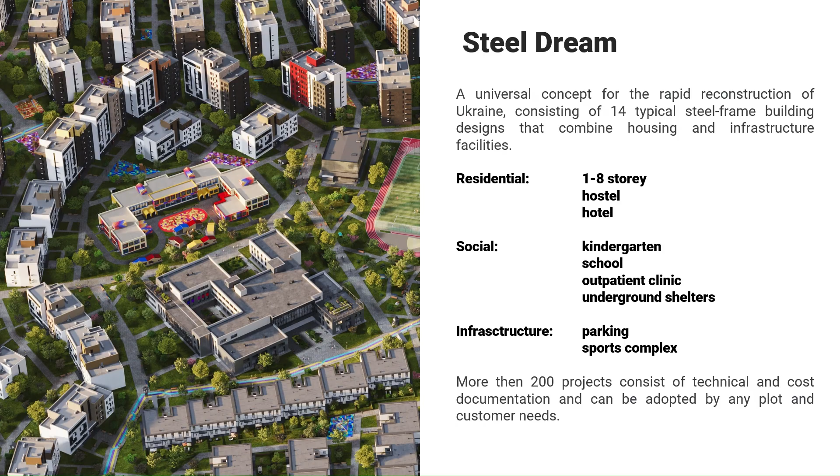Steel Dream is a universal concept for rapid reconstruction, consisting of ready-made building projects based on steel frameworks. Our catalog already contains over 200 residential and social infrastructure projects. The technology is based on a steel framework, which provides 4 key advantages: construction speed, reliability, flexibility, and environmental sustainability.

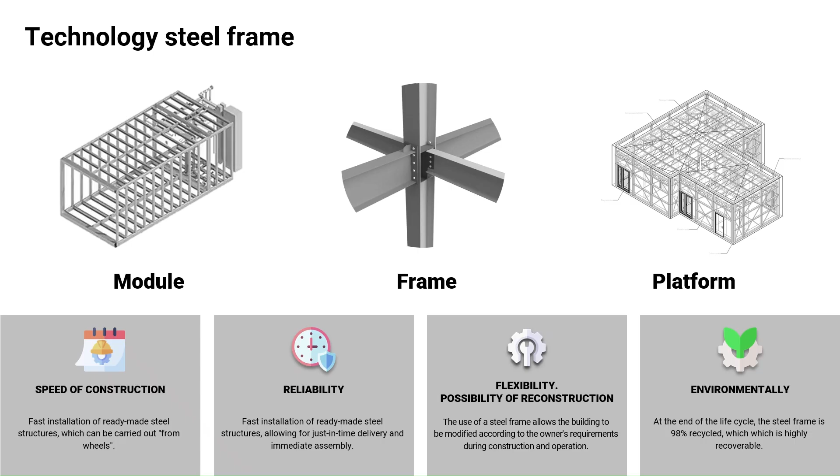Our approach is based on the principles of transparency, speed, and modularity. But most importantly, human centricity. Every solution is created with consideration for the people who will live and work here. We strive not simply to restore, but to create better conditions, following the Build Back Better principles.

Our cooperation is the result of combining efforts of many experts, government representatives, and civil society. The basic concept united the community's key projects into a single strategic vision and was presented to international partners. We present the final, detailed version.

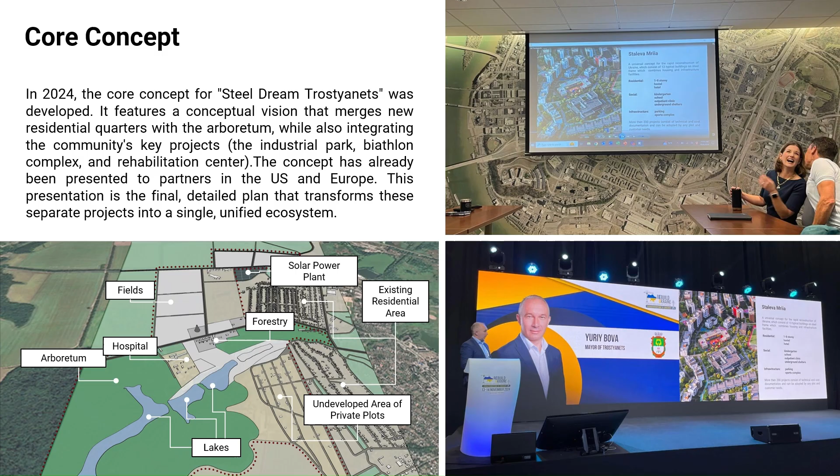Trostyanets is Ukraine's first deoccupied city, a symbol of resilience. Today it is a participant in the government pilot reconstruction project. Our partnership is a step toward the revival of modern Trostyanets.

Trostyanets community is a city with over 360 years of history, home to nearly 20,000 resilient residents, and a key participant in the state reconstruction project. The Steel Dream concept is a practical instrument that reinforces the official community's sustainable development strategy in terms of investment attractiveness, environmental sustainability, and security.

To achieve these goals, 4 key problems must be solved: weak business environment, brain drain, poor roads, and infrastructure deficiency. Our project aims at comprehensive solution of these challenges.

Real change begins with people. The conducted rebranding of Trostyanets creates an open space where every resident can realize their dream. Trostyanets has powerful advantages: industrial potential, rich history, beautiful nature, and vibrant festivals. This unique combination forms a strong, united community with great potential.

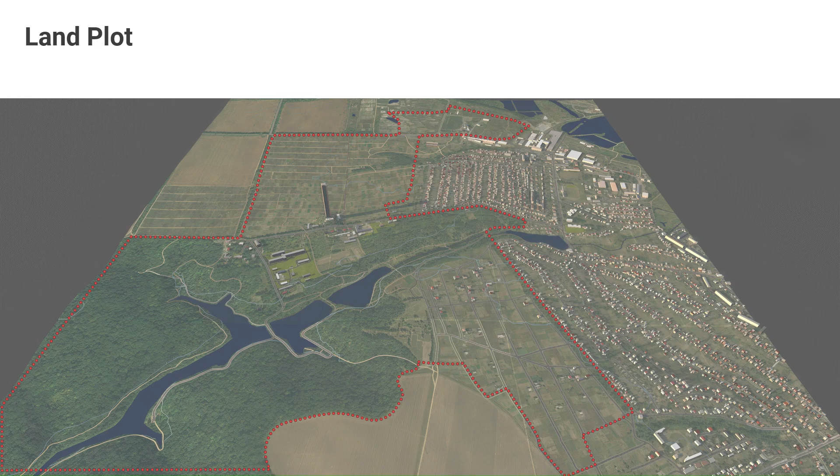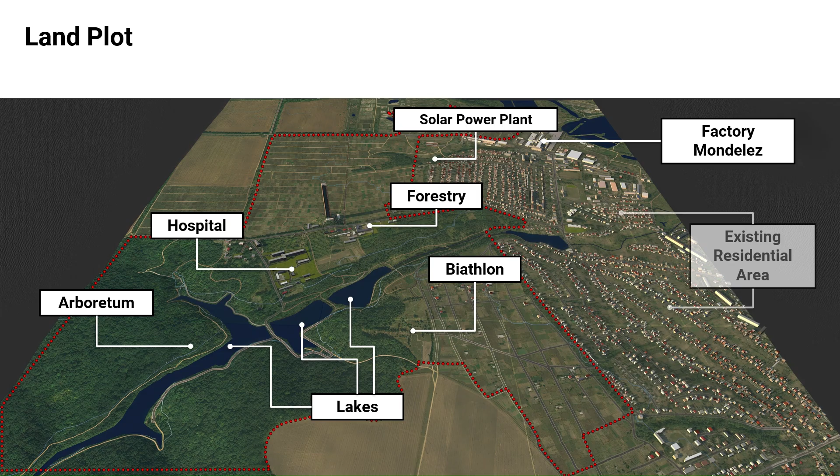Our concept creates new opportunities, connections, and growth points for industry, housing, and social infrastructure on a site located in the western part of the city. The land plot territory includes existing facilities: the Mondelez factory, biathlon complex, hospital, and arboretum, as well as an undeveloped zone for new projects and a zone for private household plots. The total plot area comprises nearly 400 hectares, has good transport connections, which is ideal for creating an integrated space.

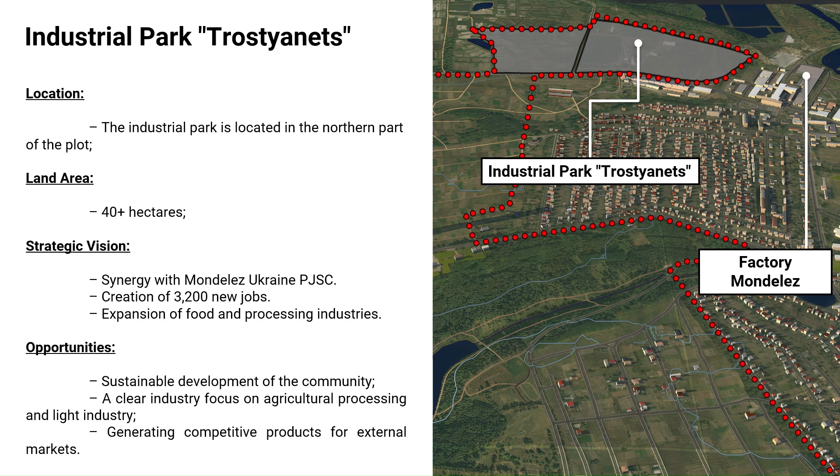The first and key element of the economic strategy is creating the new Trostyanets Industrial Park. It will be located on over 40 hectares in the northern part of the plot. This will create synergy with the existing Mondelez factory and initiate the development of modern food and processing industries. This will allow creating 3,200 new jobs and provide a powerful impetus for sustainable development of the entire community.

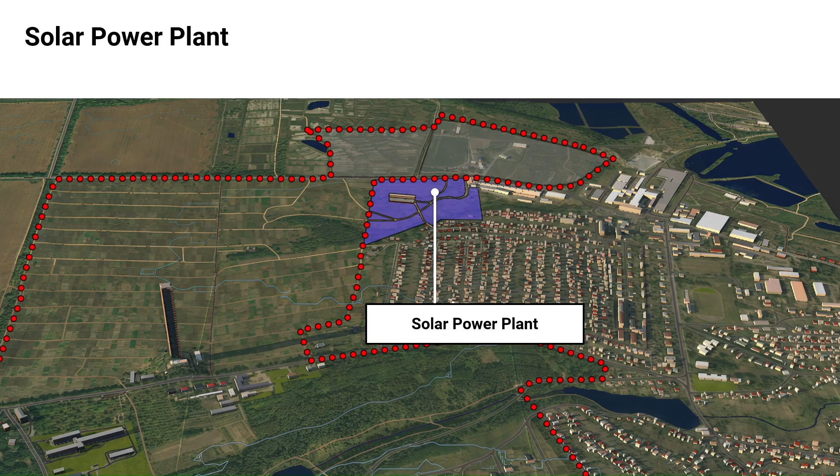The second important infrastructure project is the Trostyanets solar power plant. This is the first large-scale solar power plant in the region. Panels with 5.7 megawatts capacity have already been installed on a 9-hectare site. This is a real step toward community energy independence and a contribution to an environmentally clean future.

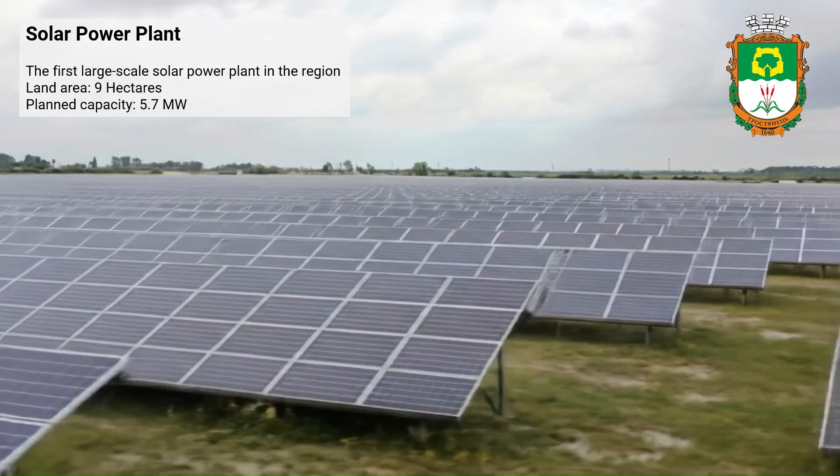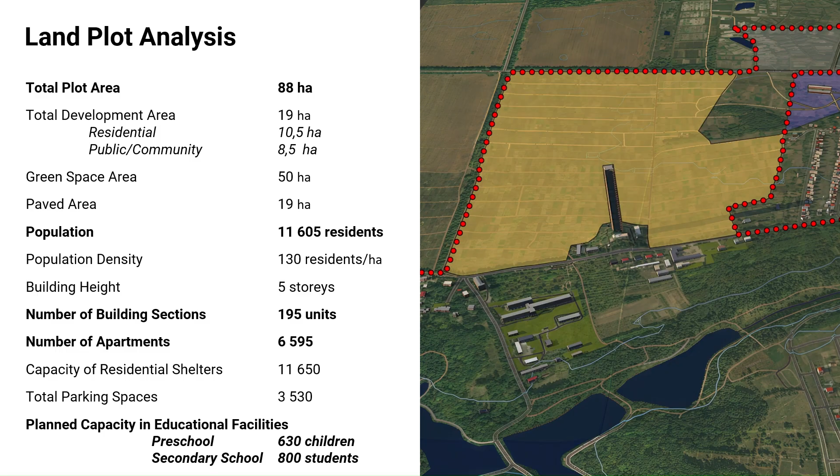Our ambitious residential concept is located on an 88-hectare plot where we propose to build housing and public spaces for over 11,600 new residents. This represents nearly 6,600 apartments in 195 5-story sections and all necessary social infrastructure, shelters, kindergartens, and schools. Existing urban infrastructure partially covers the future district's needs, so we have included the creation of new schools and kindergartens in the project.

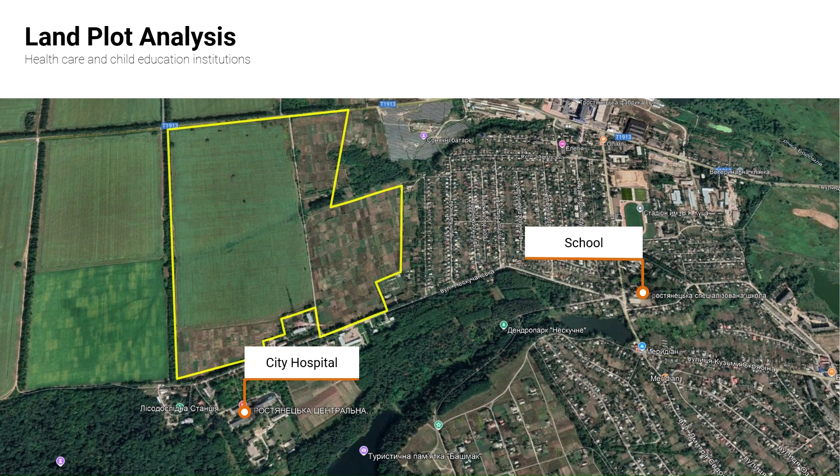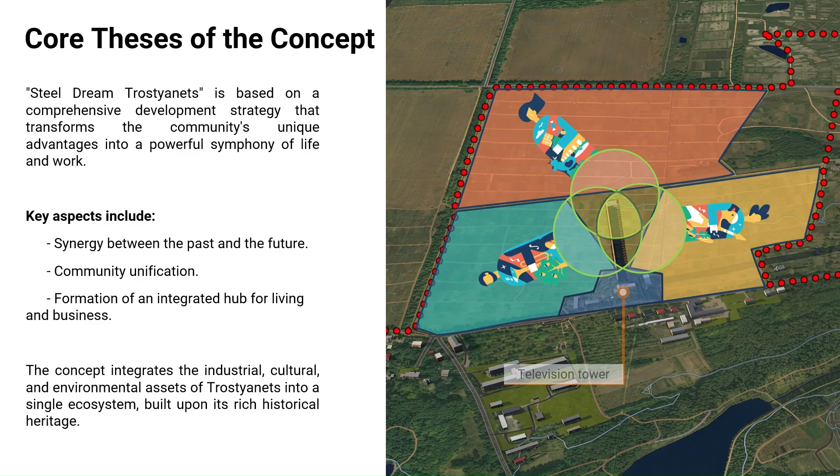During development, we encountered a number of engineering and legal limitations. Implementation of such an ambitious concept will require clarification and possible adjustments to the final project to achieve maximum efficiency. We clearly understand the risks and have a plan to minimize them, but the project's potential far exceeds all potential challenges. Steel Dream Trostyanets is our response to the challenges facing the community.

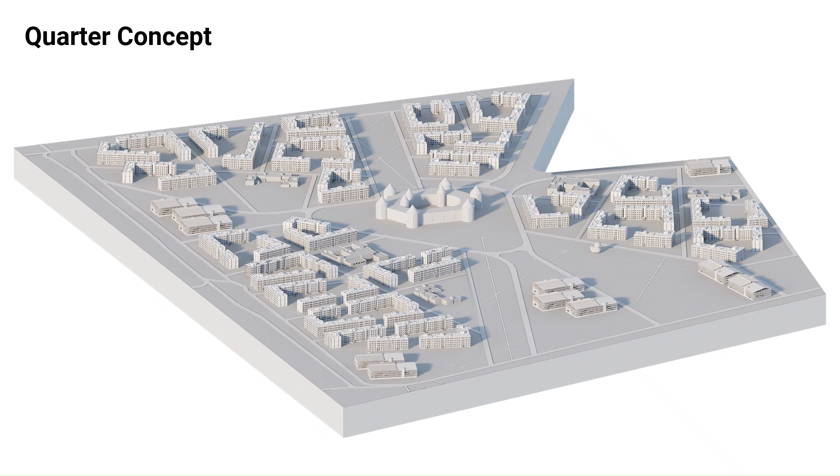We create synergy of Trostyanets' 3 unique advantages to form a self-sufficient ecosystem for comfortable living. Industrial potential, rich cultural heritage, and incredible natural resources were used to create districts, each with its own character.

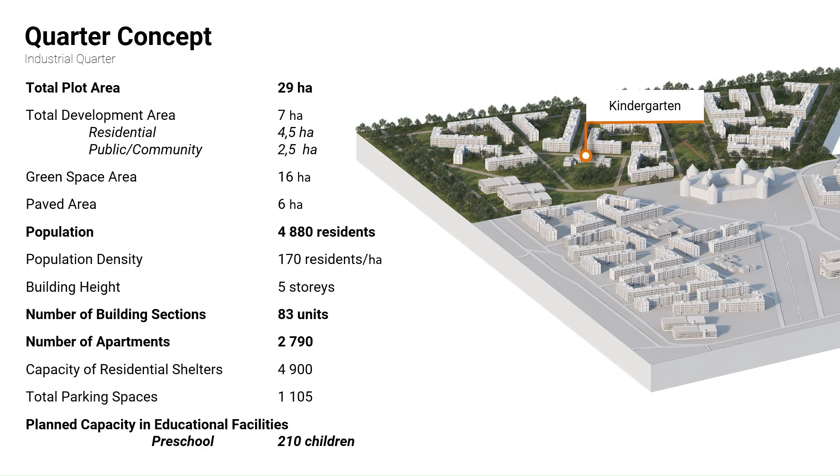Industrial district. Located on a 29-hectare land plot and designed for nearly 4,900 residents. We plan 83 residential sections here, or nearly 2,800 apartments, as well as a private kindergarten for 210 children.

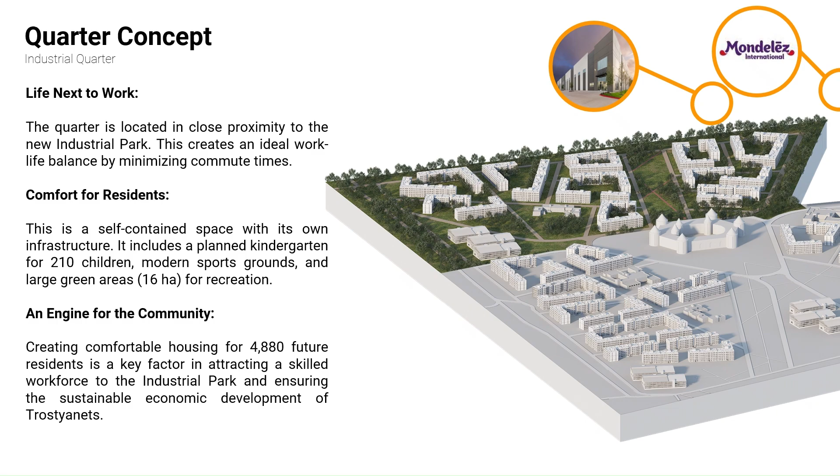The idea of this district is living close to work with complete infrastructure, minimum commute, maximum comfort. This is the key to attracting personnel and developing the economy.

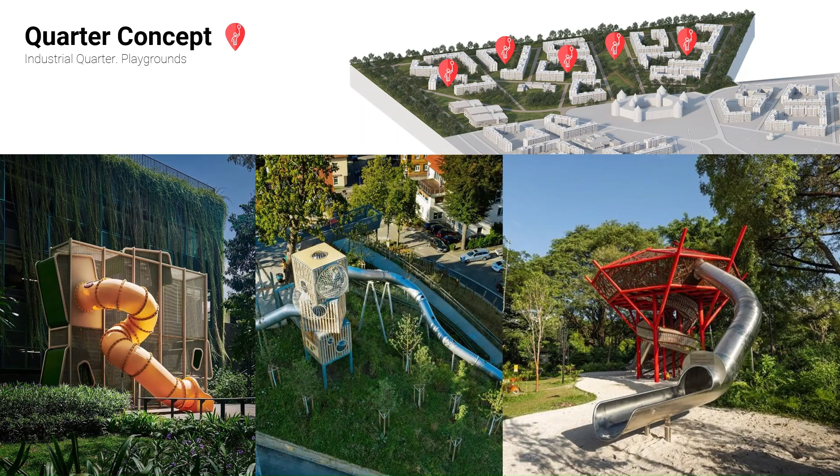Each district zone features authentic design. Here's how playgrounds in the industrial district might look. Modern, safe, focused on comprehensive child development.

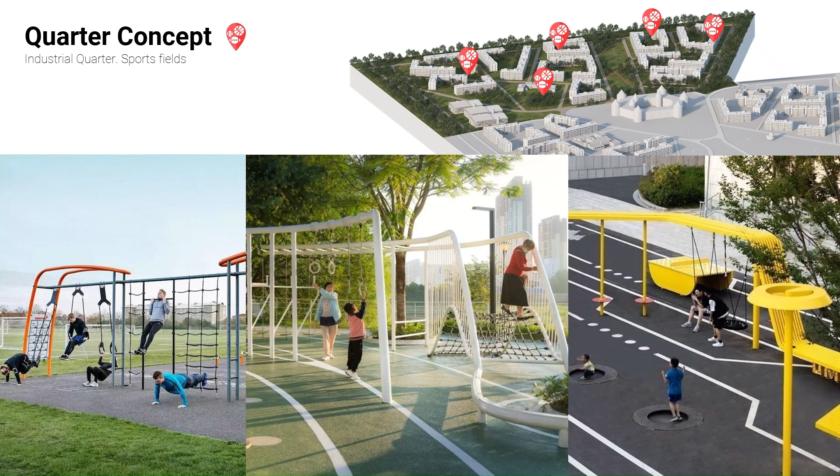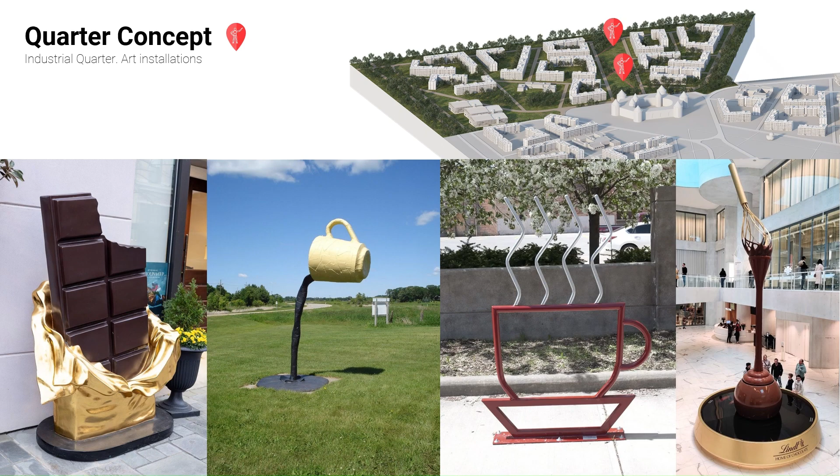Sports grounds will be multifunctional, for workout, game sports, and active recreation for residents of all age groups. Even in the functional industrial district, attention is paid to aesthetics. Modern art installations will become an integral part of public spaces, adding character and identity to the district. Over half of the district's territory consists of green park zones, modern, functional landscaping that creates cozy areas for relaxation.

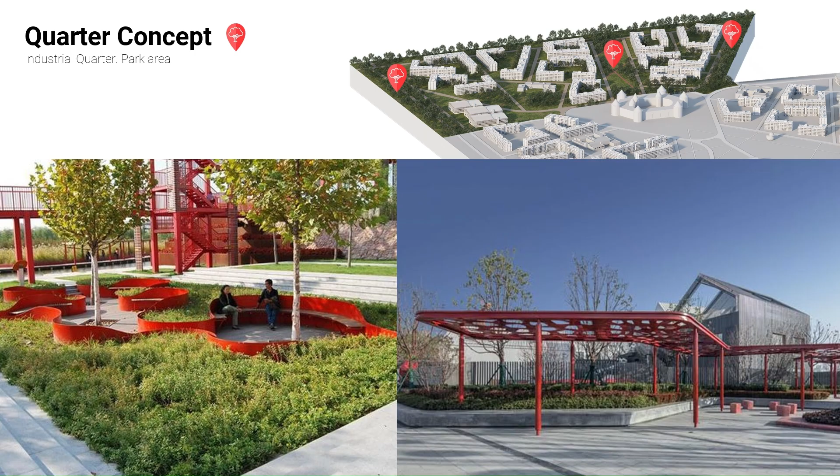This is how the industrial district looks in the general plan, a holistic, well-thought-out, and green space designed for people who value functionality and proximity to work.

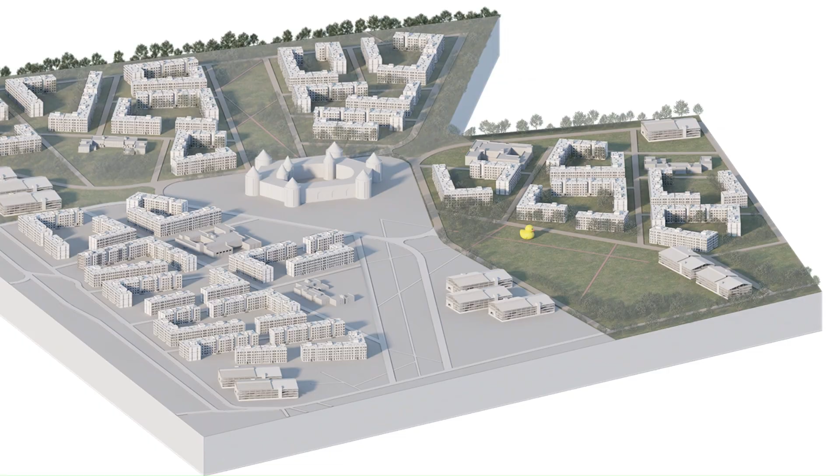Art District is the second district, with a special atmosphere and different energy. The district is designed for 2,610 residents. On a 27-hectare plot, we placed 43 residential sections. The key social facility here will be a new, modern school for 400 students, as well as a kindergarten.

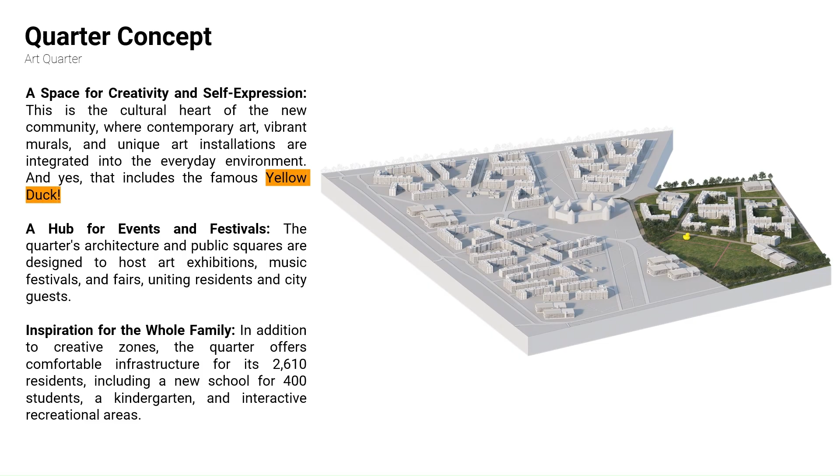This district is a space for creativity and self-expression, the cultural heart of the community, the center of events and festivals, and this is where the legendary Yellow Duck will be located. Playgrounds in the Art District are true art objects that develop children's creativity and create a creative atmosphere.

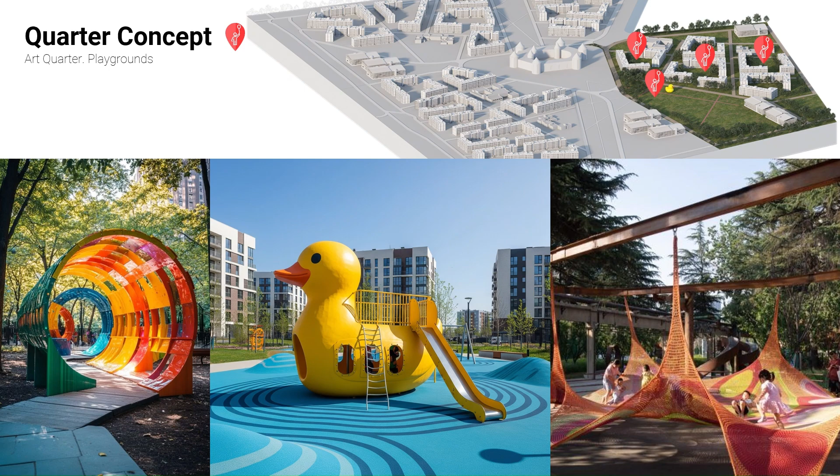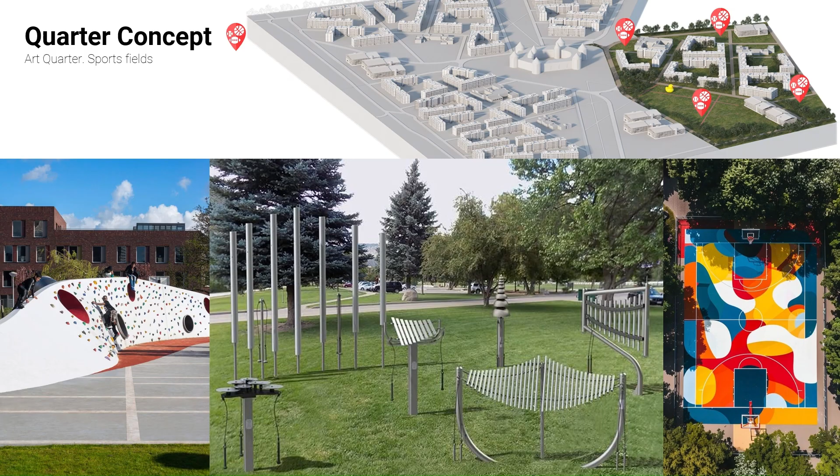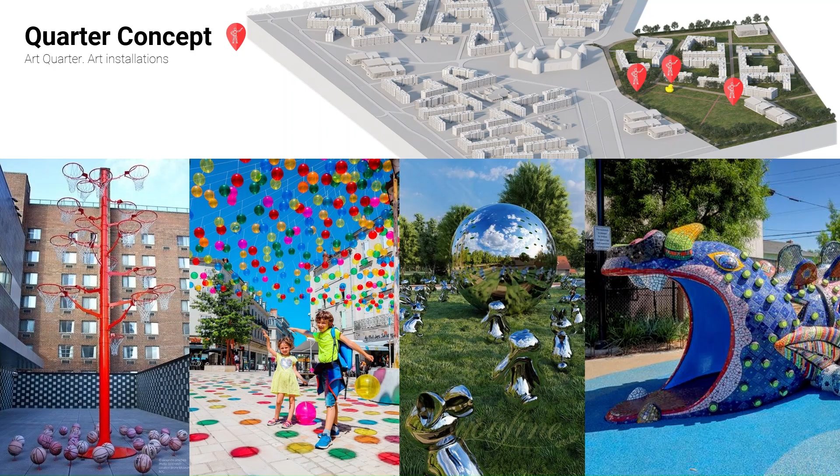Sports zones also have their unique style. They are dynamic, bright, and inspiring, perfectly integrated into the district's overall creative atmosphere. Public art will be this district's calling card. We propose placing bold, contemporary sculptures and installations here that will make the space unique, recognizable, and photogenic.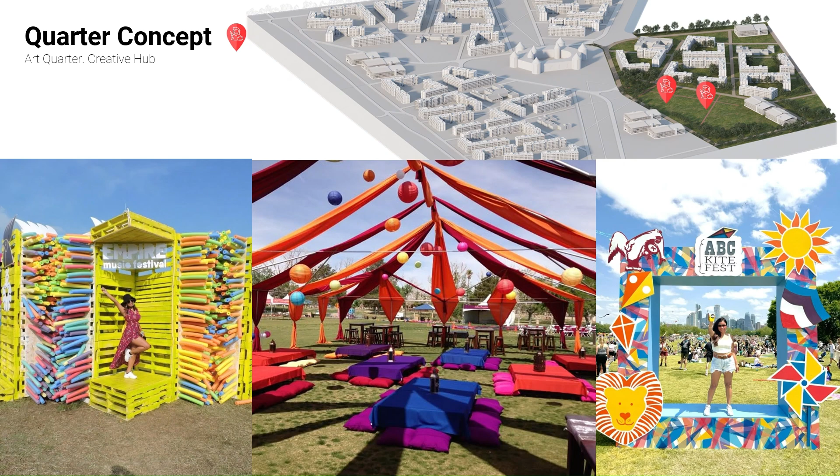Public spaces are designed as venues for music festivals, fairs, and exhibitions. This is a true creative hub that will attract people from the entire community and other cities. Park zones combine modern landscape design and art, where green plantings themselves become part of a large art installation.

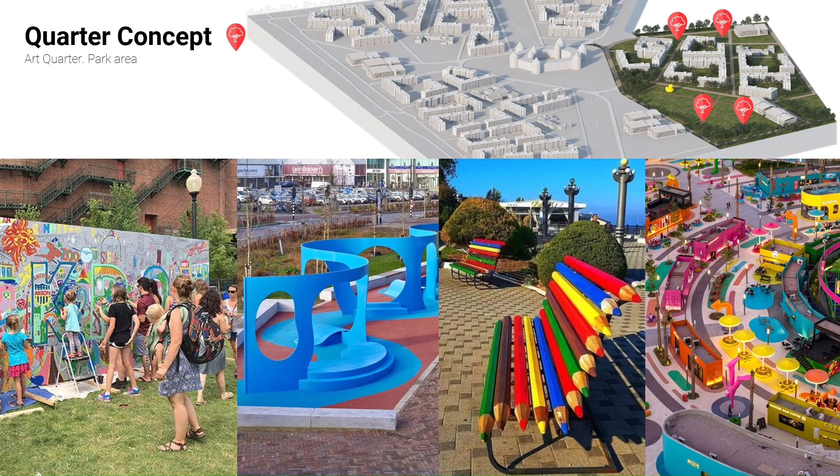This is how the cultural flank of the overall concept looks, the Art District. It's created for creative, active people who value art and communication.

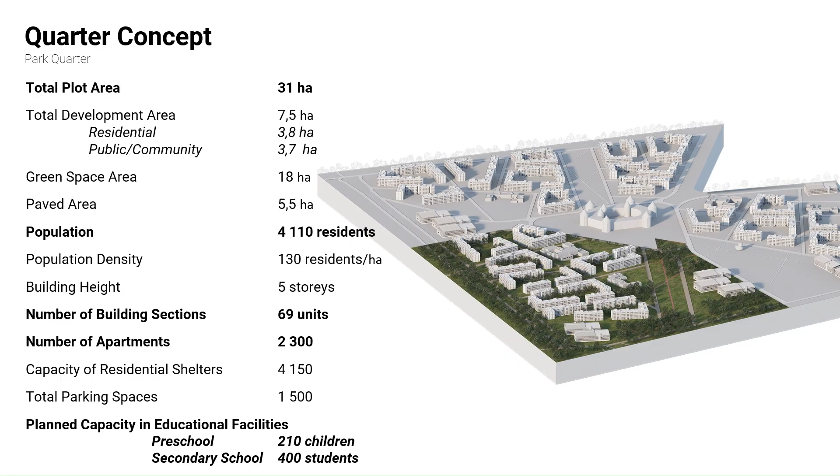For those seeking harmony with nature and valuing tranquility, we created the third district, Park District. Here, peace reigns among greenery. The district is located on a 31-hectare land plot and designed for 4,110 residents. We place 69 residential sections and 2,300 apartments. There will also be a school for 400 students and a kindergarten.

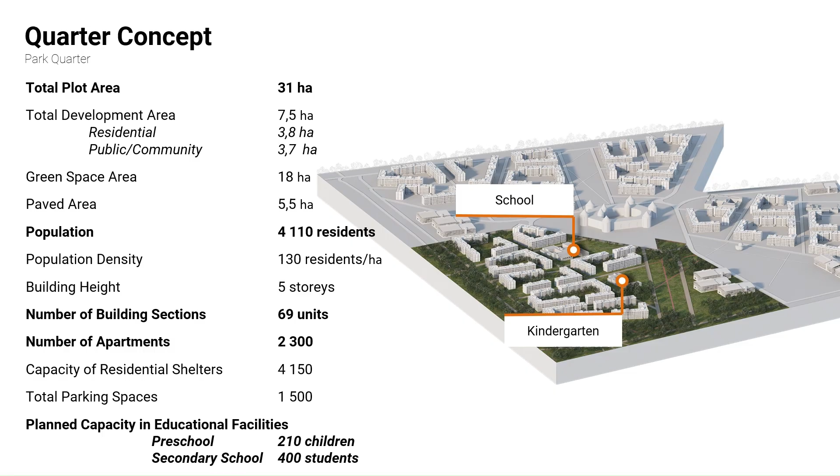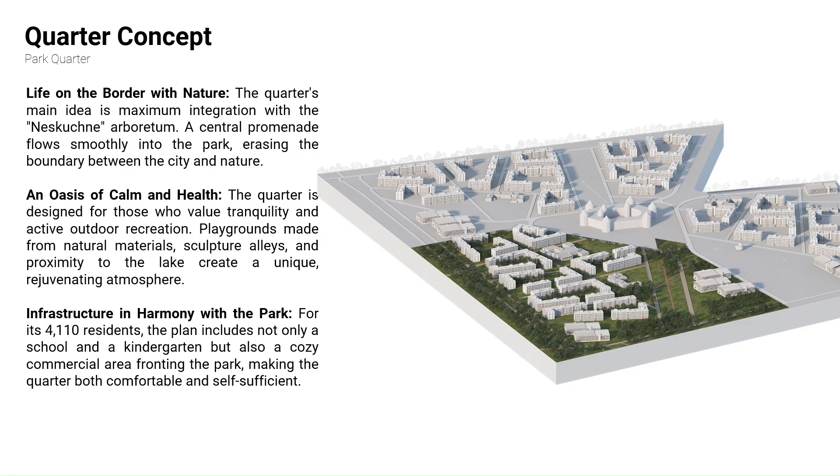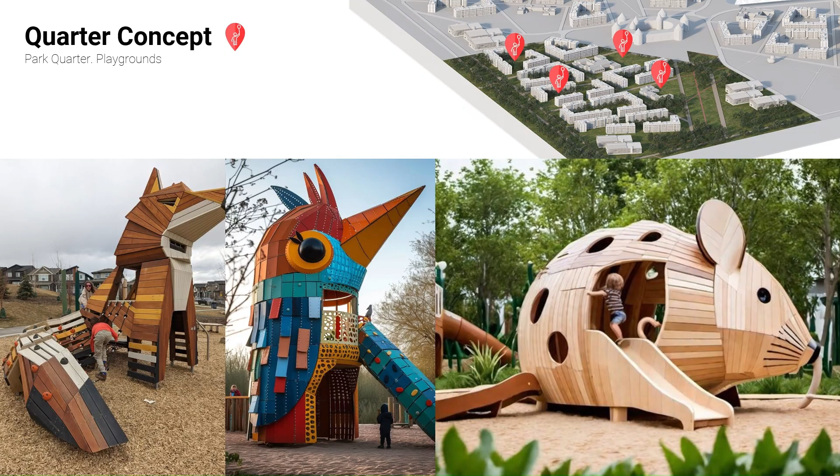This district is created for living in harmony with the nature of the Neskuchne Arboretum, a true oasis of peace and health, where all infrastructure organically complements the natural environment. Park District playgrounds are distinguished by their ecological approach and use of natural materials that inspire children to active outdoor play and form deep love for nature.

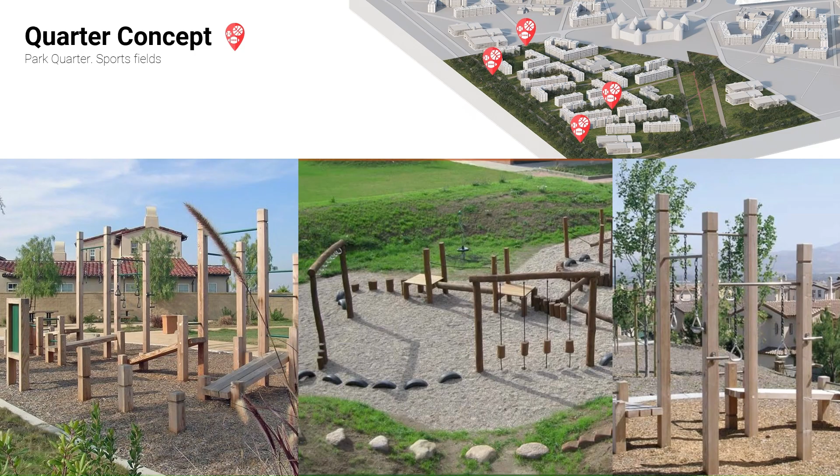Sports infrastructure will be maximally integrated into nature. These are open grounds for yoga and workout, surrounded by trees and greenery. In the Park District, art takes on special refinement. Elegant sculptures create unique alleys, transforming an ordinary walk into a true aesthetic discovery among nature.

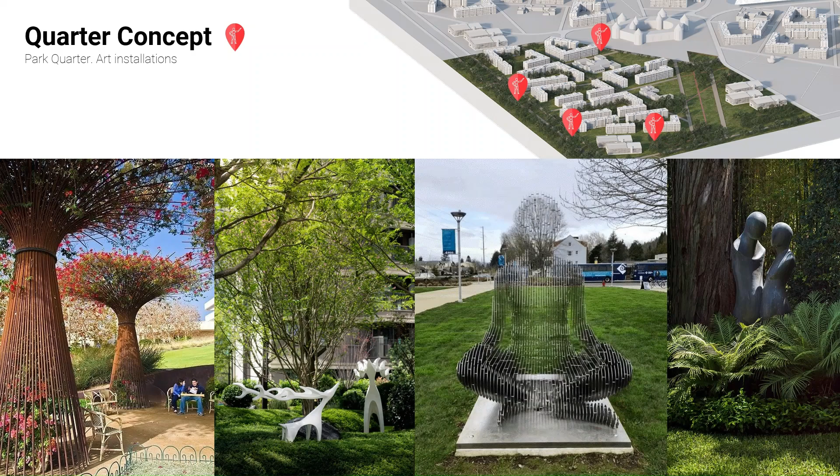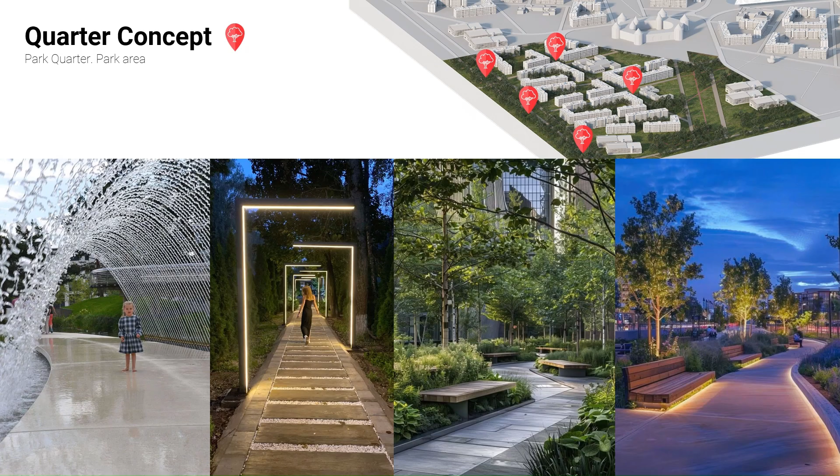The district's park zones are masterfully conceived landscape solutions that create a seamless transition from residential space to the arboretum. Residents get a unique opportunity to live not next to nature, but directly in its embrace.

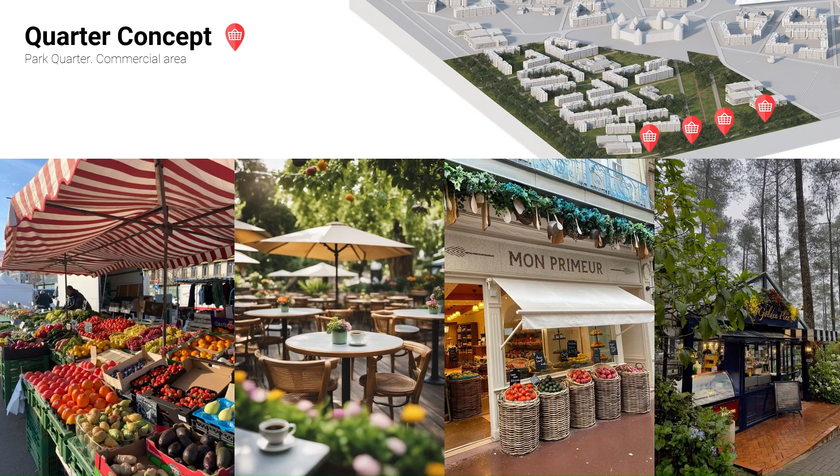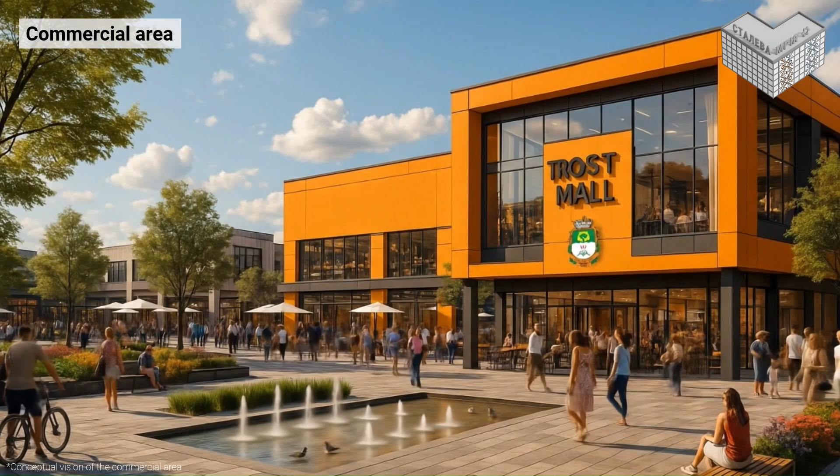The district's commercial zone impresses with its concept. Small artisan cafes and eco-boutiques harmoniously integrated into the park environment, where every purchase becomes a nature walk. Even commercial spaces here will be special, small, cozy cafes and shops with eco-goods, located directly at the border with the park.

Three unique districts, industrial, art, and park, united around the entire community's new center of gravity. The heart of the district and the gravitational force of Trostyanets will be TrostyaKolo, a symbolic center with deep historical significance for the city. The round courtyard was the stage for community life. The project continues this tradition and creates its modern embodiment, combining industry, art, and nature.

City growth will attract investors and brands to the center, creating a dynamic hub for commerce, leisure, and community life. Security is the highest priority.

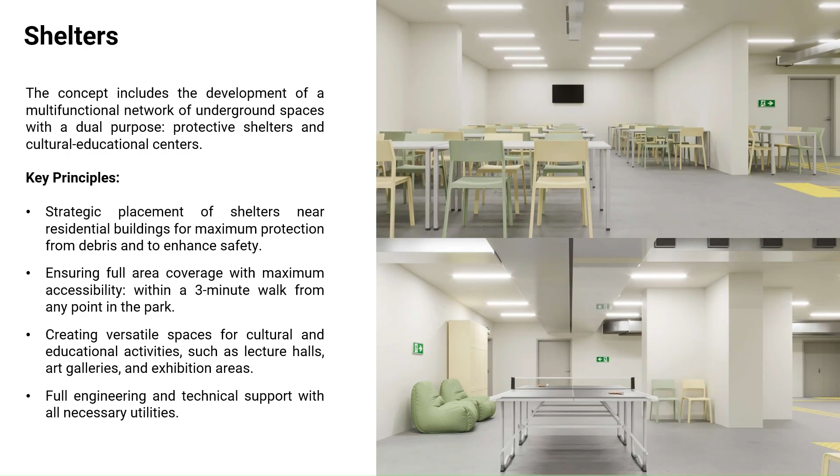The concept includes a network of multifunctional underground dual-purpose spaces, protective shelters, and cultural educational centers. They are located throughout the territory with 3-minute accessibility and can be used as lecture halls or art galleries during peacetime. One variant of the typical shelter proposed within the project framework.

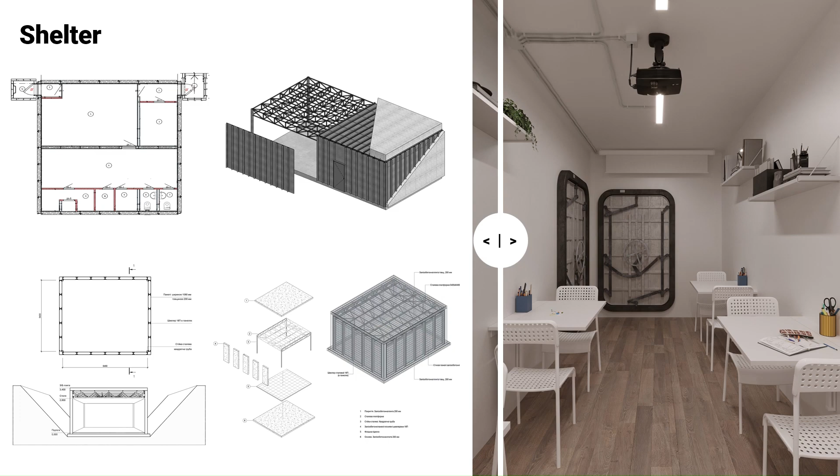Its area starts from 70 square meters and the implementation period is from 1 month, allowing rapid provision of basic security level. Thanks to multifunctionality, during peacetime, these spaces can easily transform into classrooms, small cinemas, or co-working spaces, serving community needs daily.

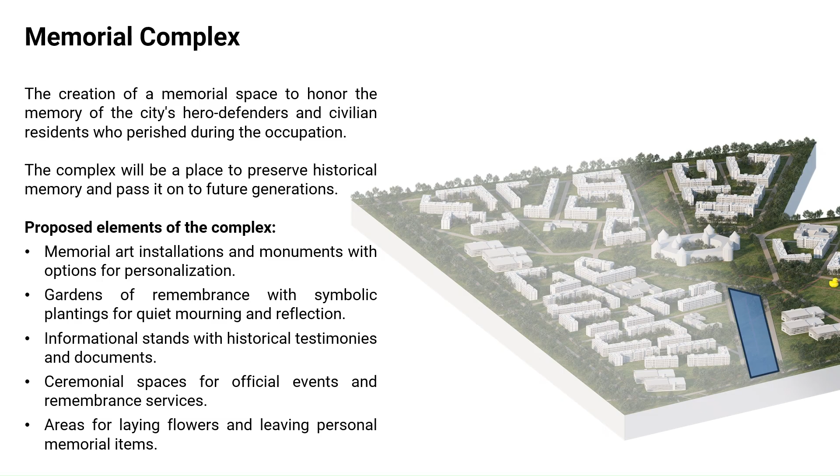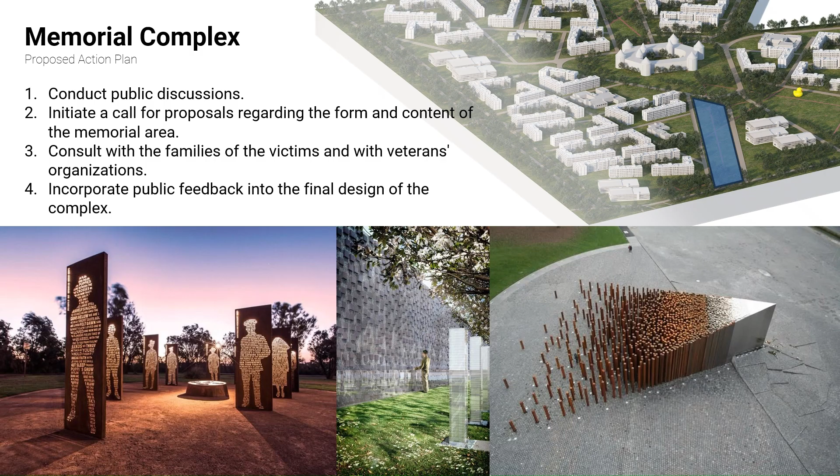Alongside the future, we honor the past. The memorial space will become a place to honor hero defenders and peaceful residents, a space of strength and memory for descendants. It's very important that the form and content of this memorial become an expression of the community's will and memory. So, we propose an action plan that begins with public discussions.

For effective management, a district management office is being created, which will manage territorial development, attract investments, and provide quality service. The My District mobile application will ensure convenient service for residents.

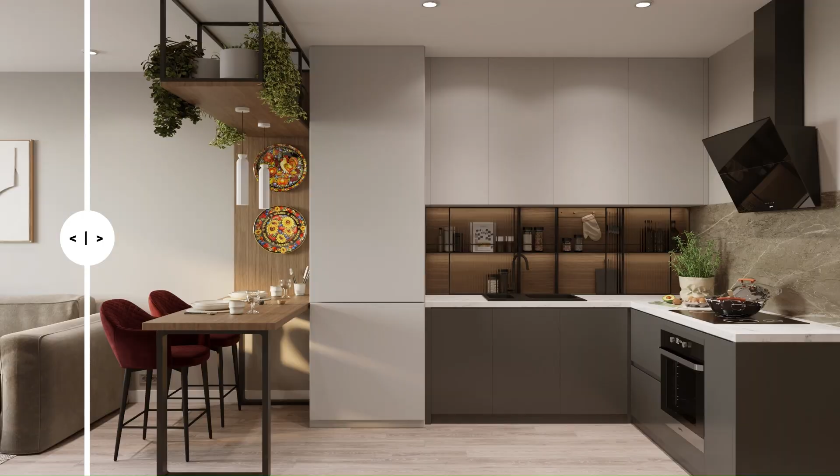Meet the project's typical residential facility. A standard residential section of 3 to 6 stories has an area from 3,250 square meters. Thanks to steel framework technology, construction time is only 5 months, significantly accelerating the commissioning process.

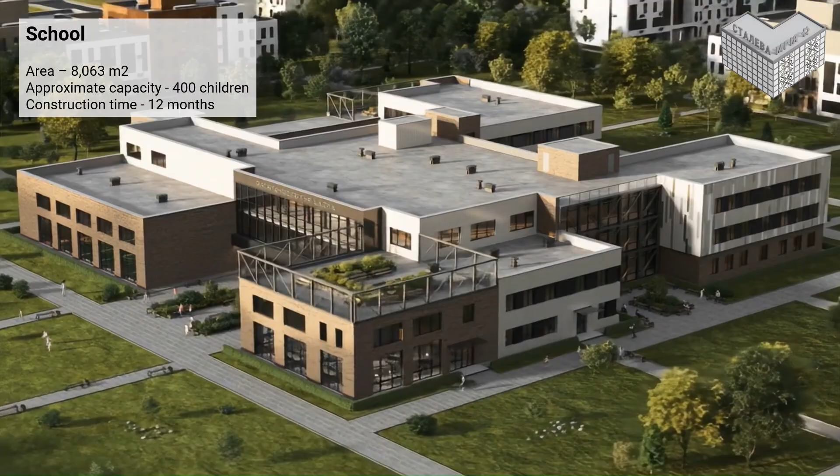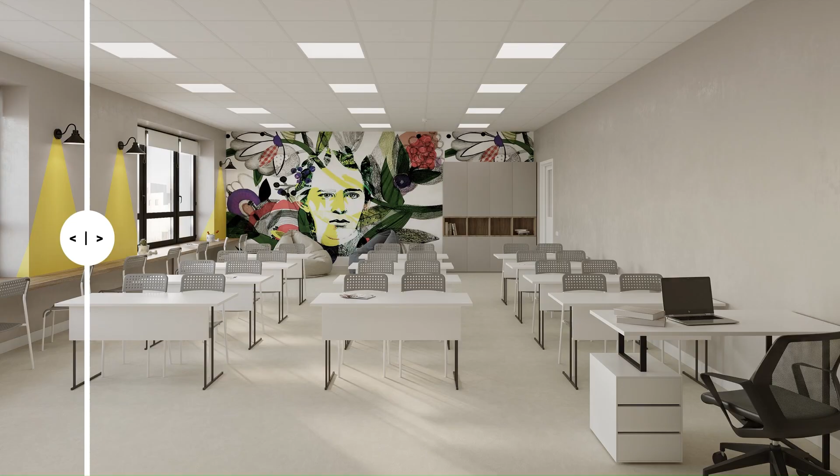We present the educational complex of the future, a school for 400 students with over 8,000 square meters. The modern space will include a large gymnasium, library co-working space, and comfortable cafeteria. Thanks to efficient construction technologies, the school will be ready in just 9 to 12 months.

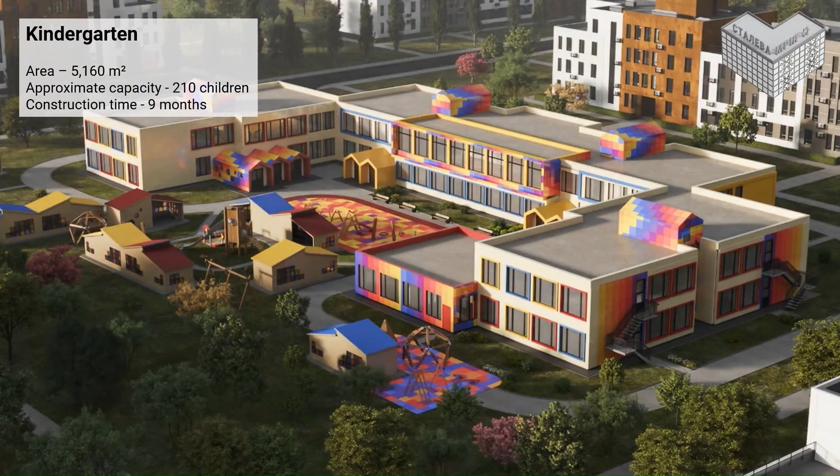The new kindergarten will become a modern educational base for 210 children on over 5,000 square meters. Innovative construction technologies ensure construction completion in a record 9 months. This will allow rapid resolution of preschool facility shortage in the community and ensure quality education for the youngest residents.

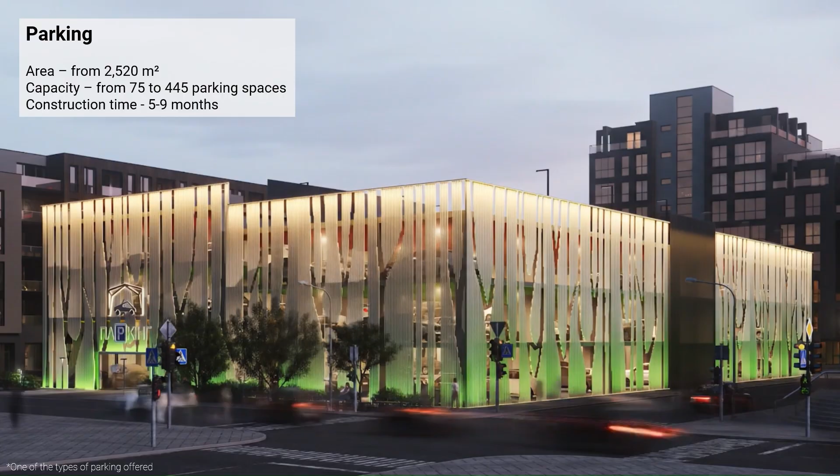Transportation infrastructure includes parking facilities with capacity from 75 to 445 parking spaces. Metal framework construction technology ensures rapid parking readiness in 5 to 9 months.

Barrier-free access is one of the project's principles. From sidewalks to buildings, we create a comfortable environment for all categories of residents.

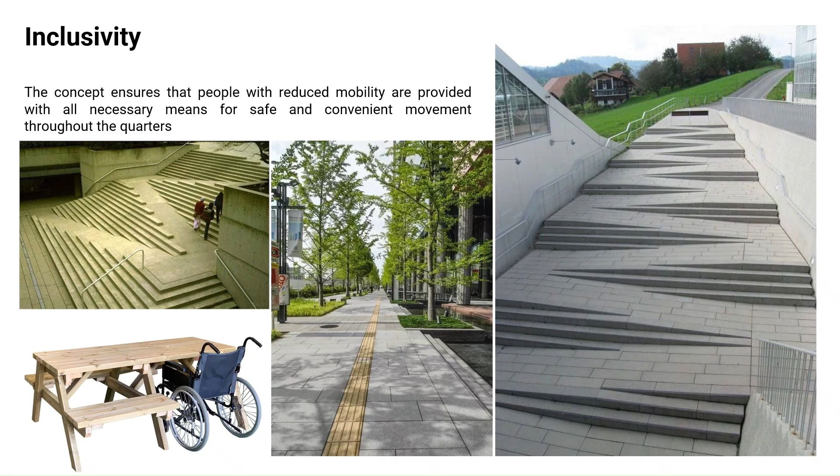Modern space must be independent. Integration of solar panels, autonomous communication points, and drinking fountains creates a self-sufficient and secure environment.

This project is a new home for nearly 6,600 families located in 195 5-story sections. 2 new schools and 3 kindergartens create a modern educational base, while 233 shelters provide reliable security.

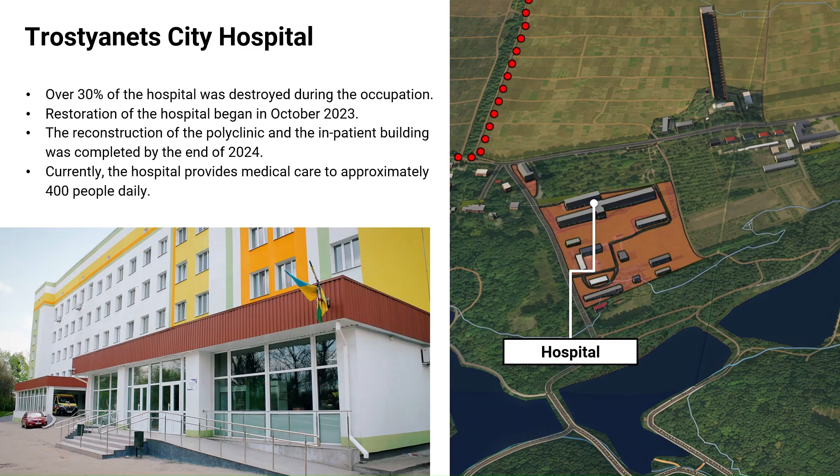Occupation destroyed over 30% of the hospital, but restoration since 2023 demonstrates the community's strength. Our project includes a powerful rehabilitation center to strengthen the medical cluster.

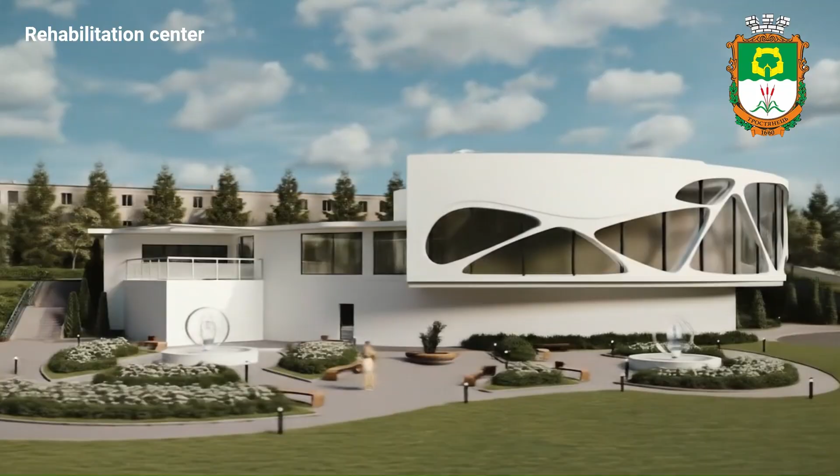The modern complex of nearly 2,000 square meters will combine medical rehabilitation with a spine traction pool, wellness zone with hydro massage and saunas, as well as a recreation area with a general pool.

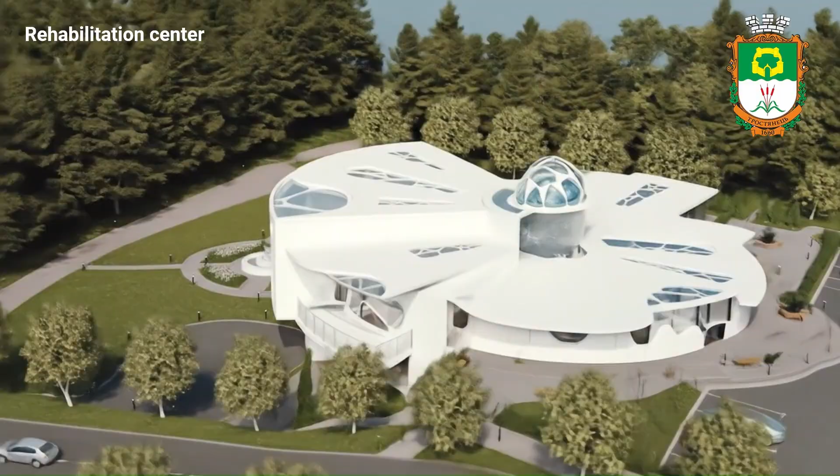The Neskuchne Arboretum is the community's true pearl. This is one of the region's richest dendroria, with over 800 flora species and historical monuments. Our goal is to carefully complement this unique natural historical heritage.

Experience from leading world parks, from Great Britain to Singapore and the USA, formed the basis of our concept. It's based on 5 key principles: biodiversity, education, aesthetics, recreation, and health. The main goal is to transform the Arboretum into a pulsating green center, combining various directions.

Let's examine the details of such a large eco-park. We will create a new, large lake with an equipped embankment and beach zone. We will establish therapeutic gardens, special spaces for mental rest and recovery.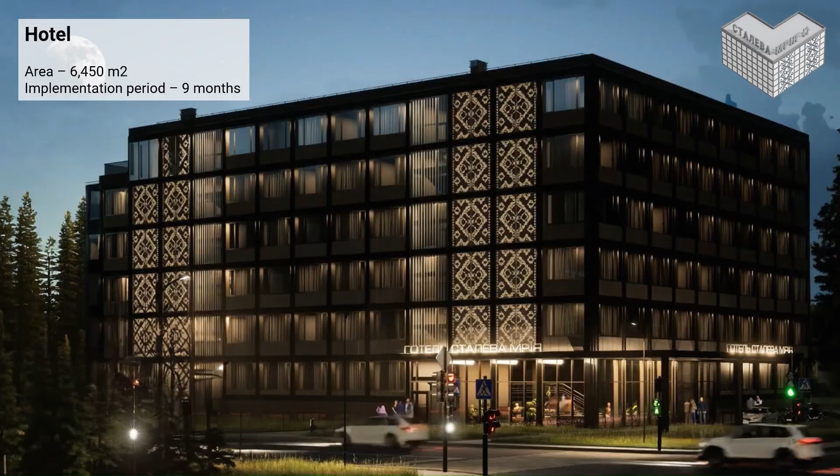We will construct a modern hotel that will become a hospitality center for tourists, athletes, and rehabilitation center patients. We will create entertainment zones, modern playgrounds from eco-materials, and a rope park for the whole family. We will designate a separate sports zone with grounds for game sports and yoga.

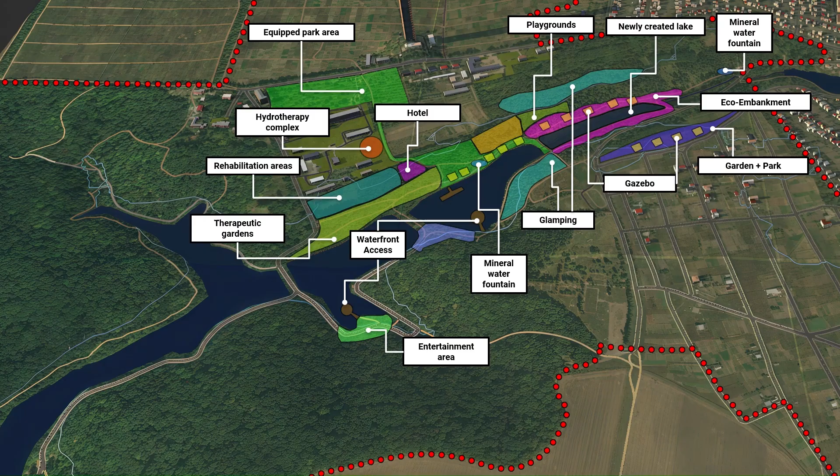We will install water fountains with clean water that will become architectural objects. We will lay out an eco-embankment with pedestrian and bicycle paths along the lakes. We will create recreation zones with gazebos and glamping. All these elements unite into a large, comprehensive family recreation zone where everyone will find something for themselves.

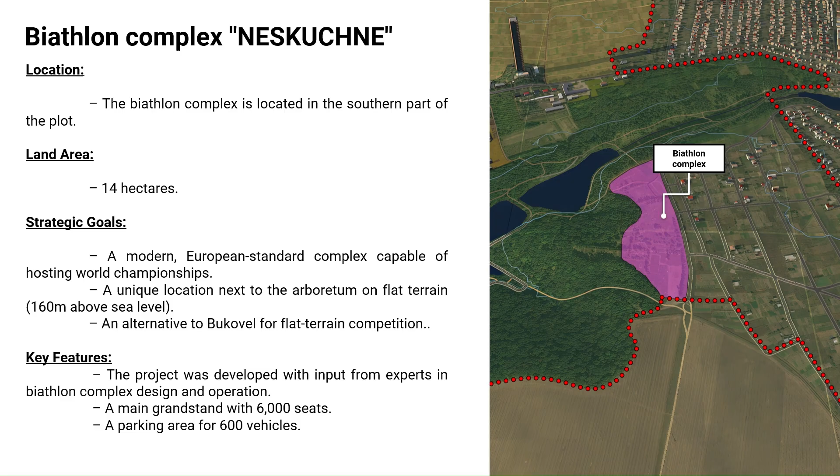The concept includes the existing Neskuchne Biathlon Complex project, Europe's future sports magnet. The unique combination of flat terrain and arboretum will create a world-class center. The complex occupies a 14-hectare site and has a main grandstand for 6,000 seats and parking for 600 cars.

The first part has already been implemented. A temporary accommodation building and cafeteria have been built, which will serve the complex's functions during peacetime.

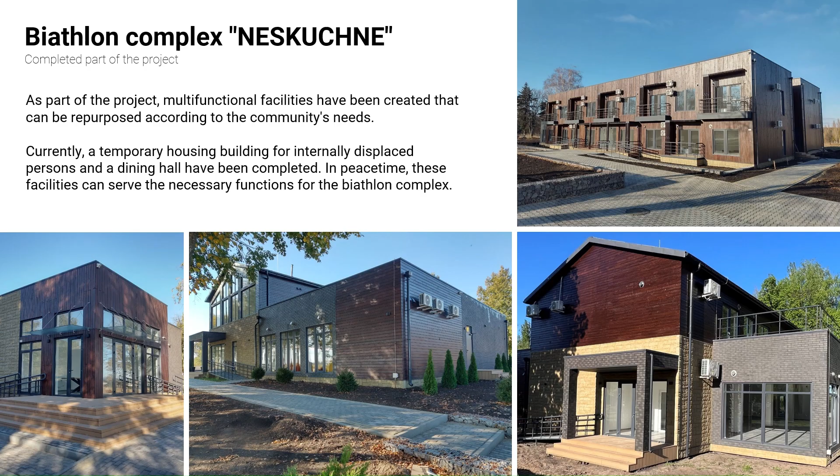For the sports cluster, we propose an exclusive cottage village on available plots. This is housing for athletes during competitions and active recreation tourists with dynamic architecture of sporting spirit.

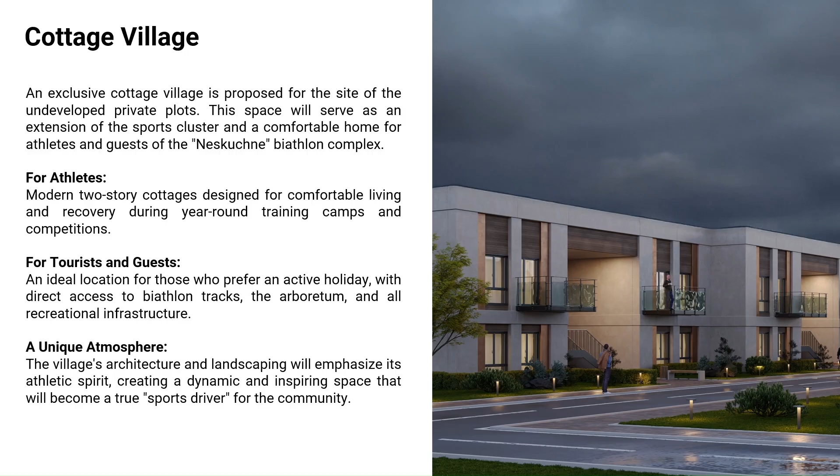Our Vision 2050 envisions transformation of Trostyanets community into a green regional center with innovative economy. In 25 years, the community will become Ukraine's tourist and sports magnet, a sustainable development standard with the highest quality of life.

We propose a sequential action plan for project implementation, from the developed concept and public discussions to phased implementation. Our immediate steps focus on finding partners and attracting investments, marketing and a powerful information campaign for transitioning to implementation of the project's first phases.

We dream, we plan, we implement. Steel Dream Trostyanets is not just a concept, it's our shared faith in the community's future and all of Ukraine.